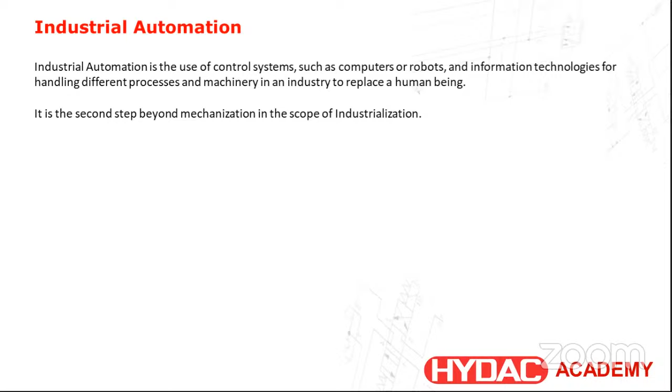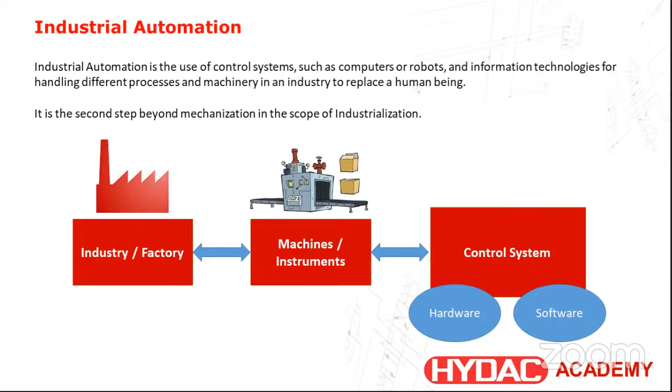When this is incorporated onto a machine, instead of sequential work which was earlier done by manual labor, it can be automated. Humans are always prone to make errors in repetitive jobs, so those jobs can be easily done by machines, and the intellectual strength or manpower we have in human beings can be utilized for better jobs in the engineering sector. As we all know, these machines or instruments are established within an industry or factory to define or manufacture a product.

This is a very common terminology nowadays, IoT, which we also refer to as Internet of Things. This is not a new name. It has been in existence for almost close to two decades now, but it was not entered into the industry. It was mainly helping out in consumer areas and domestic applications, which became very popular with a lot of other concepts coming into IoT, a simple example being a smartphone, which made it much more intelligent, much more useful, and rich in features.

Back in 2008, a group of big industries along with the German government came together and started discussing that the Internet of Things had already changed the face where people are using smartphones, and domestic applications were becoming more and more popular. So why don't we try to adopt this particular technology in industry? With this small idea, it all started.

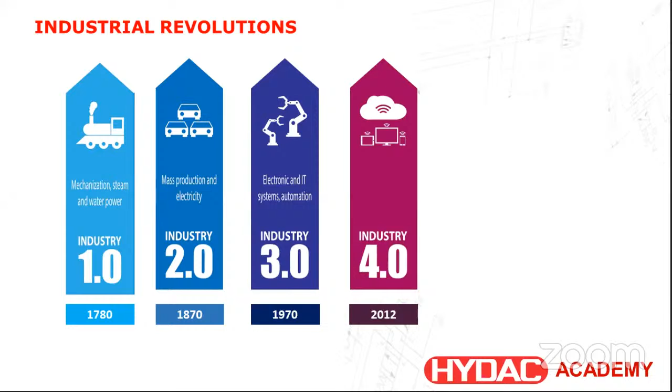It is known by very different names. Especially when we go to European countries, they predominantly refer to it as Industry 4.0. The same way, if I go to Western countries, it's referred as smart automation. In a generalized way, it can be called digitization, connected industry, or appropriately, industrial Internet of Things. As I told you, the concept started with a small discussion in 2008, but by 2012 we had concrete products which could be used for these technologies.

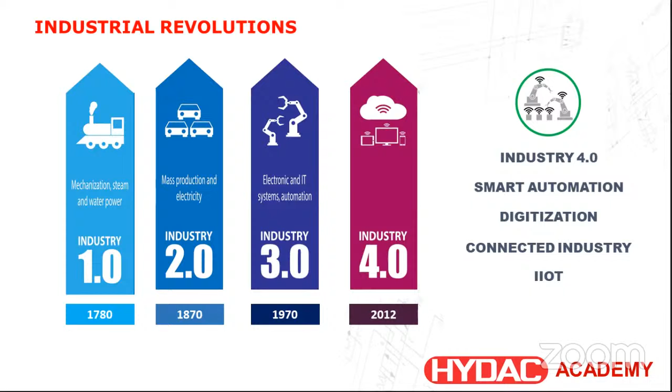Now, in a general way, if I again go back one step, what are the technologies which are contributing in industrial automation? There are n number of technologies which go into automation, but I've tried to pick up a few very highlighted technologies.

One is hydraulics, second is pneumatics, and third one I've generalized as drives and controls, which can be your PLCs, SCADA, closed loop controllers, or drives, everything. All these technologies have been contributing to us since the inception of automation.

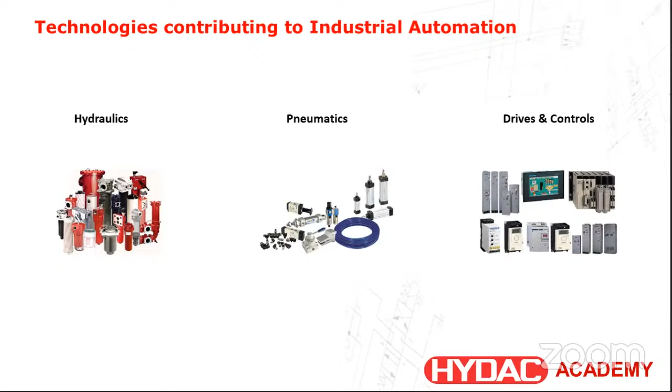So even with Industry 1.0, we had water hydraulics. But since then, these technologies also have grown to very innovative levels. Just to have a feel of it, I've taken an example of hydraulic technology.

It all started with manual hydraulics, which could be operated with human interventions. Eventually, it was upgraded to electrically operated hydraulics, where usage of solenoids came into the picture. The moment that came, I could remotely start a machine, stop a machine, or do modifications in that.

So it was basically referred to as electrically operated hydraulics, also referred as on-off control kind of hydraulics. The next came continuous control hydraulics, also referred as proportional hydraulics, or modulating valves. These were possible only because of incorporation of electronics into it.

There were a lot of microprocessors, microcontrollers, op-amps, where I could control the current using PWM switching, and many things were possible with continuous control hydraulics. Next, the demand started increasing for higher dynamics, so then came servo hydraulics, which was very fast.

The next came digital hydraulics, where it was a breakthrough between your hydraulics to connected hydraulics. Usage of software tools, a computer, to program a particular hydraulic valve was possible through this. With this, the ease of installing a thing, customizing a thing, predominantly helped the industries.

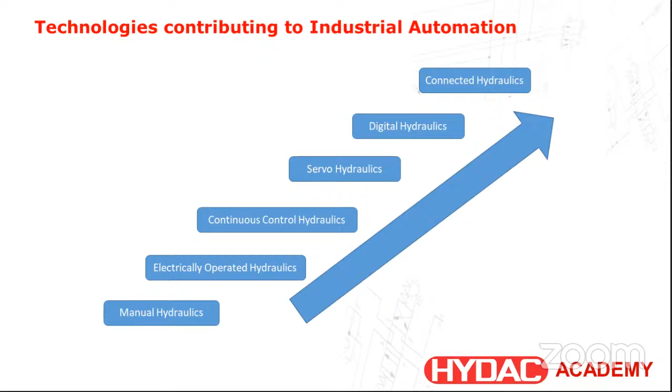So using data, we could do a lot of things - improvise the performance of the machine, improve the life of the components. And now we are at a stage where I can even predict when this machine or this valve is going to fail. So we have scaled up hydraulics from a very raw level to a very, very advanced level now. This is how the growth of hydraulics has been, and on the same lines, the growth in the case of pneumatics or any drives and controls is in a very, very exponential way.

So this is not replaceable. The misconception among students is that the moment industry 4.0 is creating a lot of buzz in the industry, everybody wants to learn about industry 4.0, but that is not the case. The basics will remain the same, the technologies which do the work remain the same - only thing is it is going to be overlaid by industry 4.0. So if industry 4.0 has to be implemented onto a machine, the base for that is your technologies, and that technology cannot be changed or replaced with anything else. So it is very important that the technology is already playing and will continue to play a critical role in the industry.

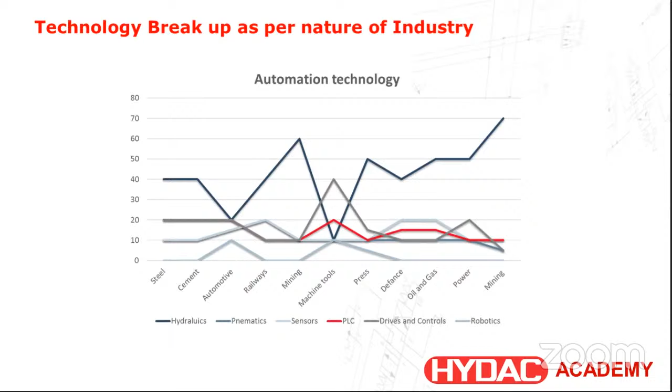But again, industry 4.0 will add more and more functionalities into this. At the same time, there is one more very important thing to see - in any automation sector or automation product, the role for software is increasing exponentially. This doesn't mean the scope for mechanical and electrical or electronics is decreasing. The role of software is increasing, whereas mechanical and electronics will continue to contribute in this sector. When it comes to the contribution part, more intelligence is being incorporated through software.

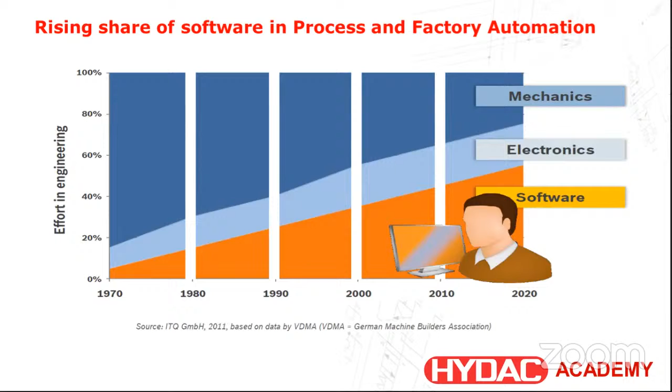So very simply, at a residence itself, you've got your smartphone connected to the internet, your TV connected to the internet, your ACs come with Wi-Fi, your lighting systems are connected to internet - everything. So now, to add on to this, we have our industrial components - your component level or the machine level, everything is connected to the internet. And this is only possible because now we are able to handle large amounts of data on secure networks.

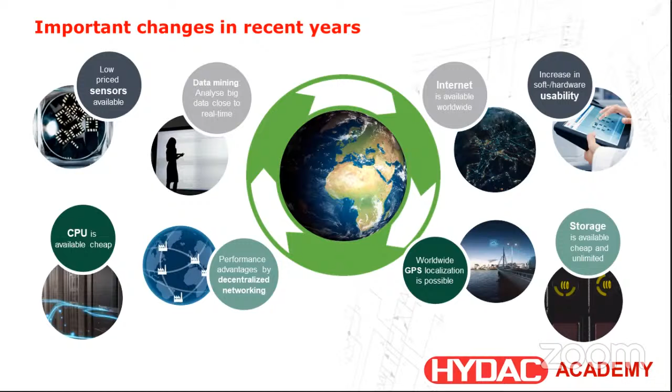But with all this, the biggest concern in this particular sector is data breaching and data security, cyber security. Because when a company is completely automated, the data is in the cloud, and that is the only thing which has to be secure. Anybody who can breach into that particular data can destroy the whole mission virtually. So data security plays a very important role.

So there are various sectors which are growing a lot. Automotives are becoming smarter, household equipments are becoming smarter, whereas our focus today is industry becoming smarter. So it's not only the things we are making smarter, but how we produce these things also has to be smarter. With that focus, Industry 4.0 has emerged a lot. Apart from that, smart cities, smart healthcare, these are all buzzwords you hear on a day-to-day basis.

So I've been referring since the start to whether this is a fourth industrial revolution. The biggest question to ask is whether it's a revolution or an evolution, because it started way back in 2012, and till today there have been tremendous enhancements happening in this particular area.

So in fact it is both. Business-wise it is a revolution, because for example, if you want to sell a TV without any features, it's difficult to sell it. But the moment I say it can connect to the internet, you can stream from your mobile, everything, it's easier to sell that product. So it was basically a business revolution. But when it comes to the concepts and products, it is an evolution, and this evolution is still happening.

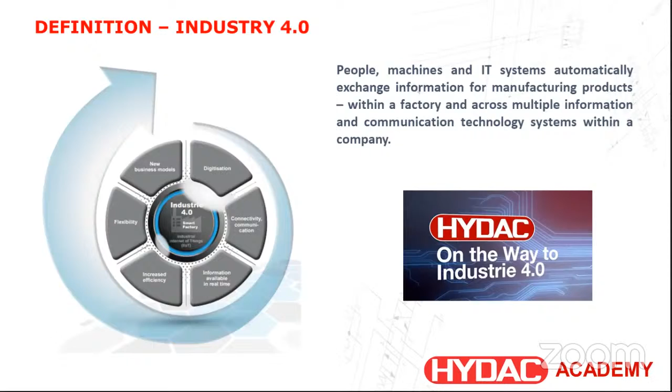In other simple words, it's a merger of industry and information technology, where each of these particular areas will contribute a lot. Whether it's machine safety, time to market, energy efficiency, productivity, life of the components, these will be the prime focus for industries, and this will be overtopped by things like cloud computing, data mining or big data. You have to ensure the safety of the machine from human beings, and at the same time safety of human beings from the machines, with a lot of sensors and intelligence built into it.

Networking is a big challenge. Taking the example of the company I work for, HYDAC, we have around 60 manufacturing plants across the globe, and everything is connected to each other. So setting up this network, a very secure channel to transmit or exchange data, is very important.

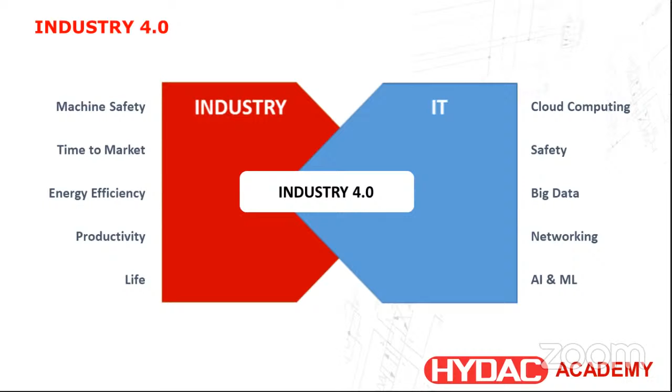Once we have a sufficient large amount of data collected, artificial intelligence and machine learning can be applied to enhance the quality of production, safety, and optimize the process.

Under Industry 4.0, several different branches have emerged in recent years contributing to the industry. These include autonomous robots, cybersecurity being scaled up to a whole new level, and augmented reality, virtual reality, mixed reality trying to enhance the user experience of operators and maintenance engineers.

Additive manufacturing - all these days we had 3D printing with plastic materials, but now we have metal depositions possible, where prototyping can be done at a very fast rate. This technology is emerging in such a way that it can also be used for mass production of components.

Big data analytics, cloud, horizontal and vertical communications - if I have to communicate between 10 machines within a factory, we refer to it as horizontal communication. When a group of companies and each factory has to communicate or exchange information with other factories, we call it vertical communication.

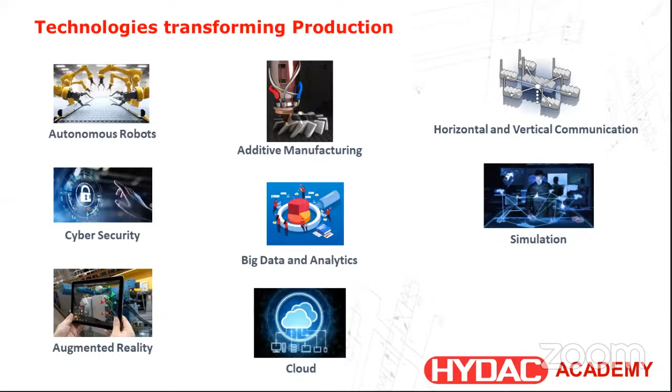We also have an emerging branch called cyber physical systems, or digital twin, or simulation, which helps in making new production changes in the production line and understanding how it will affect actual production. Everything can be simulated in a virtual world - this is possible because of digital twins or cyber physical systems.

So the smart factory, or the future of process automation - basically, what does industry need? Industry needs lean management, so there should not be much inventory. It should follow the concept of just-in, just-out manufacturing. Also, improve the quality of production and reduce the rejection rates.

Increase the energy efficiency. For example, if I have a machine doing a continuous job, at certain small steps of its job the motor can be turned off, and by doing so I can save energy. So a lot of things can be optimized, which we are looking for.

The next is use of unskilled labor. Certain jobs may get eliminated, but at the same time Industry 4.0 is also creating a lot of job opportunities. Conventionally, today's ITI holders doing assembly work have a better skill set to do something else. So the purpose is to take unskilled people and slightly tweak them to do assembly work, while ITI people can be used for supervision.

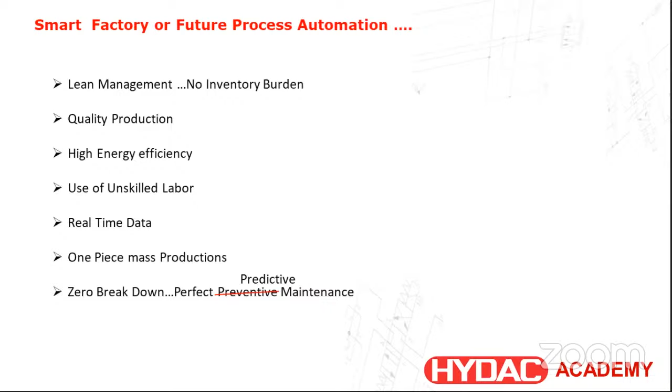But now this has changed from preventive to predictive. With a lot of real-time data, artificial intelligence, and machine learning, I can start predicting that a component has deteriorated and that next week, Wednesday, 2 o'clock, this component would fail. So today itself, I can plan to procure the new component, and instead of stopping the machine for 2 entire days to do all the checks, I stop it for 10 minutes, replace the component, and production is back to full swing. All this is possible with Industry 4.0.

So finally, what are the benefits of Industry 4.0? It is very flexible. We can use a lot of high-level programming languages — Python, Java, C++, C Sharp — all can be utilized to program present-day controllers. Innovativeness can be brought in with the integration of IT technologies, so each and every automation will be unique and customized for the customers.

It is more efficient because once developed, it can be created as a toolkit. So another person who wants a similar kind of concept doesn't have to invent the wheel again — he can take that particular toolkit and utilize it. There are n number of toolkits available for various different concepts now.

Finally, it is also future proof. Since it is a software-driven technology, just like we receive firmware upgrades on our smartphones to enhance functionality and optimization, automation components can also have firmware upgrades by which we can enhance and optimize the products on a continuous basis.

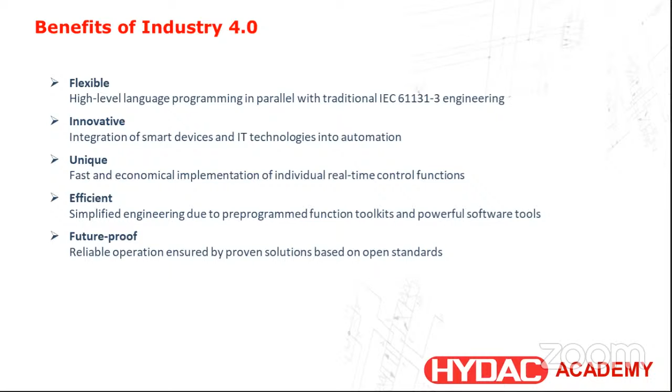This is very important for our young engineers to learn, because there are a lot of hints, and our government is working towards improvisation in the manufacturing sector. Recently a huge budget was sanctioned for wafer fabrication also.

These are a few facts I had taken. One fact stated that by 2021, 6.4 lakh jobs would be lost by the IT sector to the automation industry. Thanks to COVID, this has been delayed, so it will take some more time for us to gear up. But that doesn't mean the requirement in the IT industry will go down — rather, the demand will increase in automation industries.

Similarly, by implementing Industry 4.0 in the right manner, the manufacturing sector can make India a global leader in manufacturing. This may not happen very soon because our neighboring country has enhanced and is at a very rapid growth level, so in order to gear up, we have to start implementing this now.

It's not only the core industries, but the IT industry also knows the benefit of Industry 4.0, where big IT giants like TCS, Infosys, and Tech Mahindra have started hiring at a very rapid pace. Their IT solution requirement isn't necessarily increasing, but everybody has understood the potential of Industry 4.0 in the coming days, and those companies are gearing up to provide services to such industries.